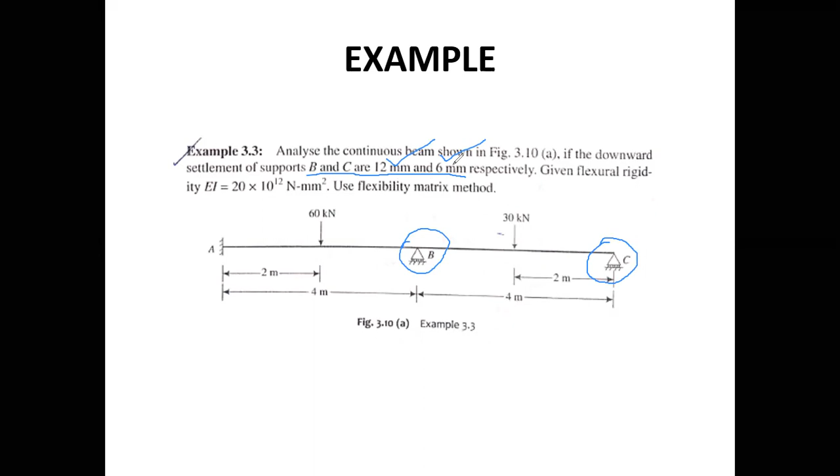is that supports B and C are showing a settlement of 12 mm and 6 mm respectively. That means this support B and this support C is giving a displacement, settlement of 12 mm and 6 mm respectively. So by keeping these things in mind, we'll simply proceed as we have done the analysis for previous cases.

So first of all, step number one will be drawing an M upon EI diagram for this. Before that, we need to know how many coordinates should be there. So in this case, at this support, the number of reactions will be 3. At this support, it will be 1. At this support, it will be 1. So total, it will be 5. 5 minus 3 equilibrium equations is equal to 2. This is the degree of static indeterminacy in this case. So at least 2 coordinates should be selected in order to analyze this.

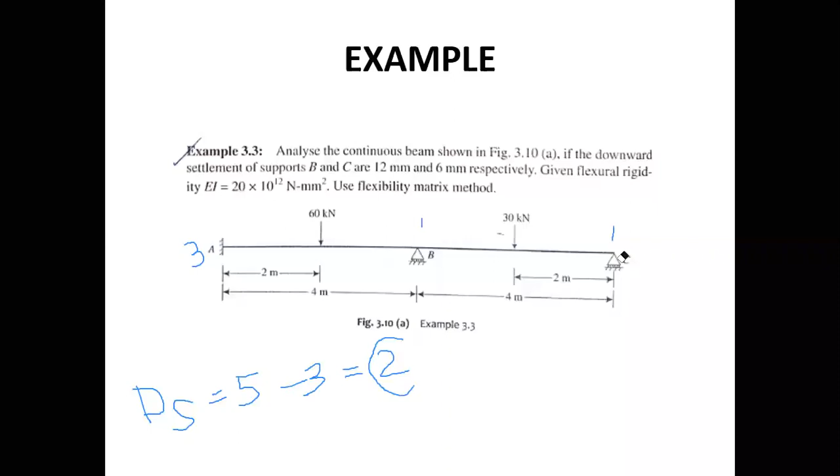So we'll start. Here, we have selected B and C as 2 coordinates. Coordinate direction 1 will be B and coordinate number 2 will be C. So the second step is we will draw the moment diagram and proceed to its M upon EI diagram. So this figure shows the M upon EI diagram. This diagram varies like this. This is a real beam, and this is its conjugate beam.

We know that in case of a conjugate beam, the fixed end becomes free. That's what happens over here. Also, the free end becomes fixed. So A has become free and C has become fixed. So this is the M upon EI diagram for the particular beam. And here, the total displacement in the coordinate direction 1 will be equal to the moment at B dash in the conjugate beam. This is by the conjugate beam theorem. So moment at B dash will be what?

Moment at B dash will be due to the loading, that is due to this load. This will be simply the load of this trapezium. Load of this trapezium will act here. So load of this trapezium multiplied by the perpendicular distance, then again load of this trapezium multiplied by the perpendicular distance will give the total moment at B dash. So it can be formulated like this: 120 multiplied by 2 multiplied by 3 plus 1 upon 2. That is a triangle.

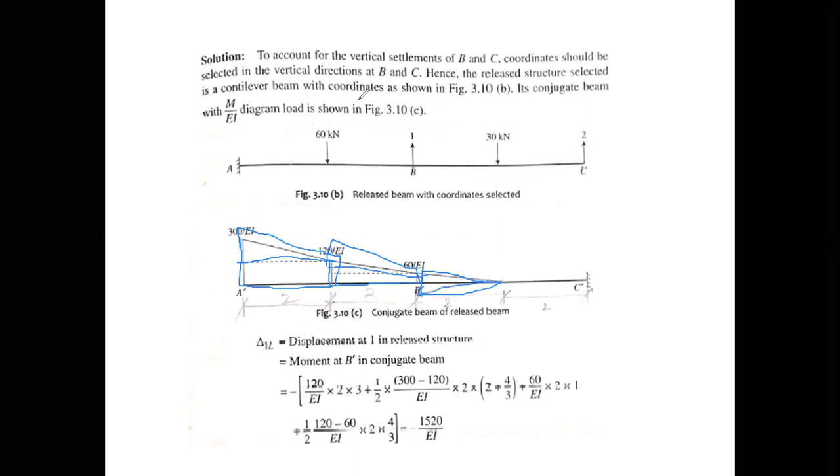So this is how we can calculate the total load of this diagram and simply get the moment using all these equations. We get the moment over here equal to minus 4279.86 upon EI, and by substituting the value of EI, we get the final delta 2L equal to minus 0.214 meters.

Now, for getting the flexibility matrix, we have to apply the unit load in coordinate direction 1 as well as 2 and get the final displacement. So we have applied a unit load of 1 kilonewton in coordinate direction 1, and this is the M upon EI diagram for the same. This will give the value of del 11, that is the displacement in coordinate direction 1 due to the load applied in coordinate direction 1 only.

So this is the load. This is applied over here. When we have applied the load of 1 kilonewton over here in coordinate direction 1, this was coordinate 1 and this was 2. These are the coordinate directions. We have applied load over here and we are seeing its impact on the same point, which denotes delta 1 1. Then in this case, similarly, that is the moment at B dash.

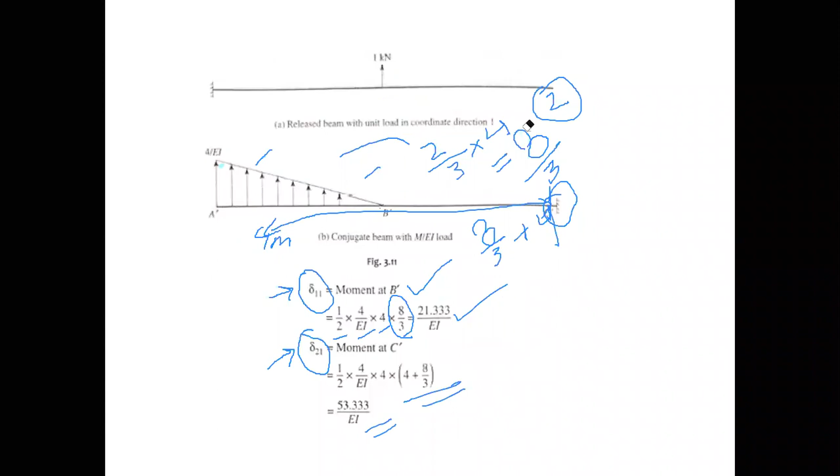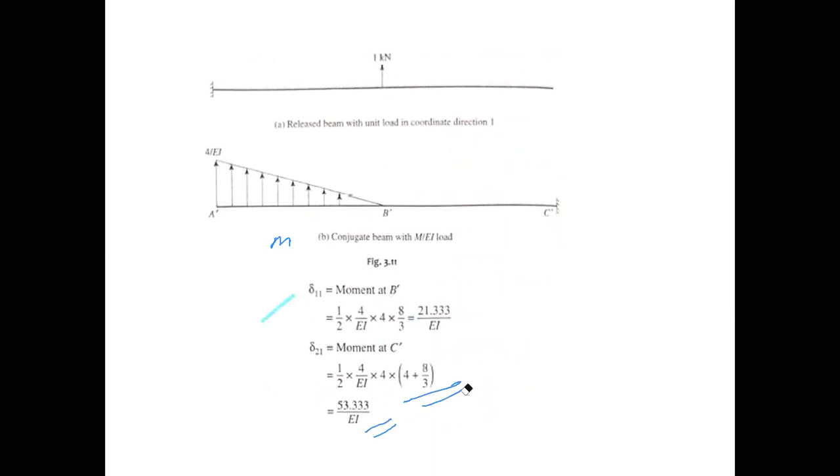So in the first case, we have applied this unit load in coordinate direction 1. Now we have 2 coordinates, so in the second step we'll apply this unit load in coordinate direction 2 as well, and we'll calculate the displacement coordinates. So in this case, we have applied a unit load in coordinate direction 2, and the M upon EI diagram for the same comes out to be like this.

Again, this del 12 represents that the load is applied on coordinate direction 2 and its impact is seen on coordinate direction 1, that is over here. So we have to calculate the displacement coordinate over here. That will be equal to the moment over here at B dash. So the moment over here will be simply due to this loading,

the load of this, which can be divided into the load of this triangular portion and this rectangular portion, and the whole load will give the moment at this point. So we have to calculate the moment at B dash, and that will be equal to del 12. So the load of this triangle is half into base; base is 4, into height; height is 4 upon EI.

See, this height is 4 upon EI. So the height over here will be 4 upon EI, and the rest of the height will also be 4 upon EI. So this is 4 upon EI multiplied by 8 by 3. 8 by 3 is the distance from its centroid to this point, plus the rectangular portion.

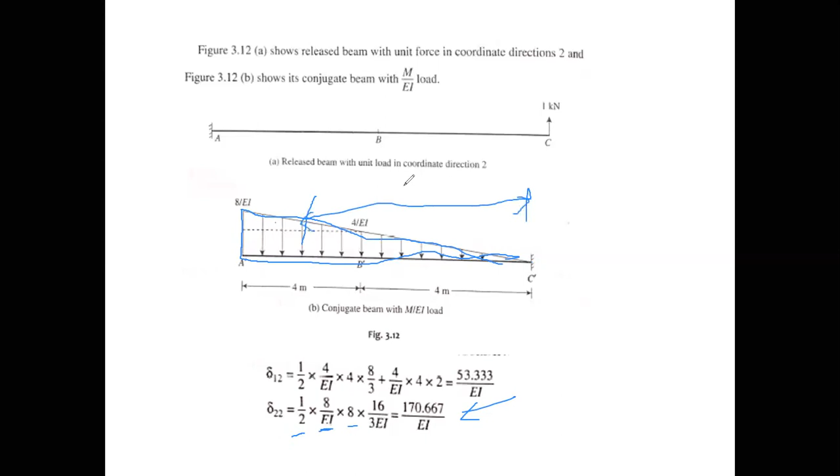That will give the value 170.667 upon EI. This is multiplied by the distance from the centroid of this triangle, and we know that this is 2 by 3 of the base. The base is 8, so that is 16 upon 3. This is what is written over here.

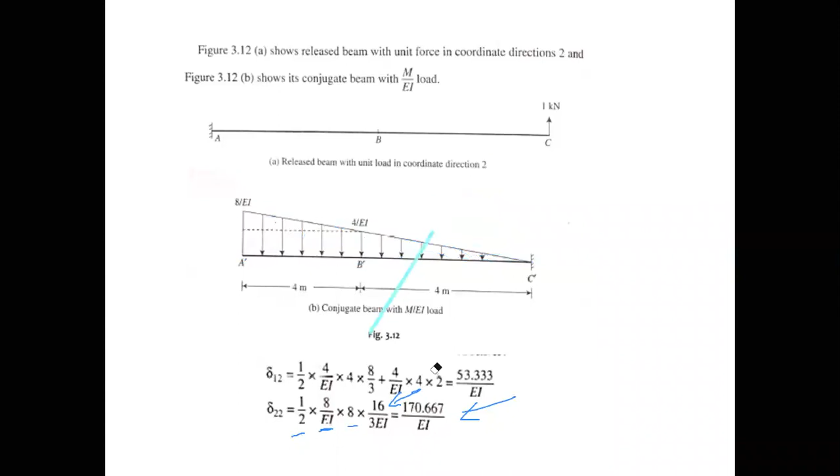This is how we have calculated all four displacement coordinates, and we can simply write our flexibility equation. We'll substitute the values of these coordinates over here in this matrix. Now, the question asked for the final displacement. See, in the question it was given that

supports B and C are showing a settlement of 12 mm and 6 mm. So we can simply conclude that the final delta matrix will give these two coordinate components, that is minus 0.012. That was in mm, so we have converted it to meters, and the minus sign simply shows the settlement is in the downward direction.

Similarly for the support C as well, that is minus 0.006. So we'll substitute all these values into this flexibility equation like this. These all are the values of delta, del 11, del 12. This is del 21, and this is del 22.

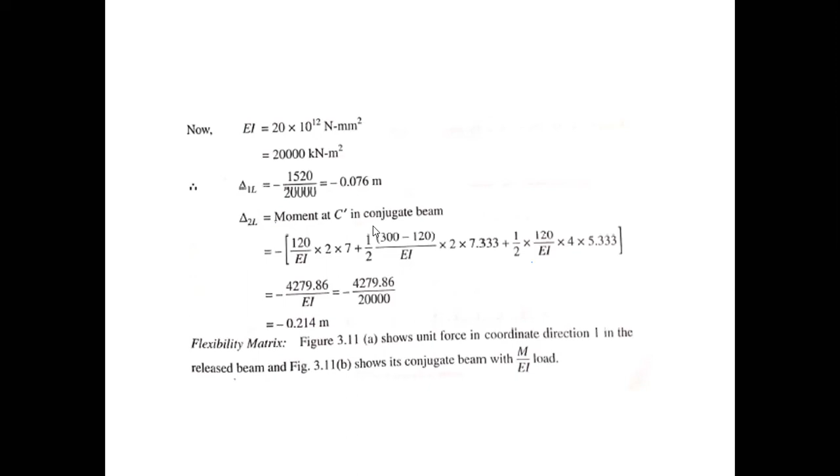Over here, we have calculated delta 1L and delta 2L. These are the final displacements due to the load in coordinate direction 1 and coordinate direction 2. So we have substituted the value over here, and this will give the final forces in coordinate direction 1 and coordinate direction 2, that is F1 and F2. So this thing goes to this side, and this will give the inverse of this, and we can simply calculate its inverse like this.

That is by putting the value of EI. We know that it is 20,000. So 20,000 divided by, we have already discussed the method to calculate the inverse, that is 21.333 multiplied by 170.667 minus 53.333 multiplied by 53.333, or we can simply say its square. Then this diagonal will change the position, and this diagonal will change the sign. So this is what happens over here, multiplied by this thing.

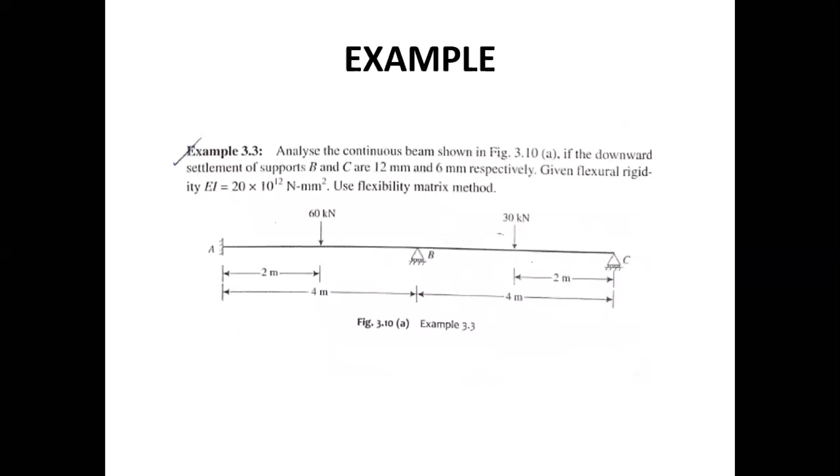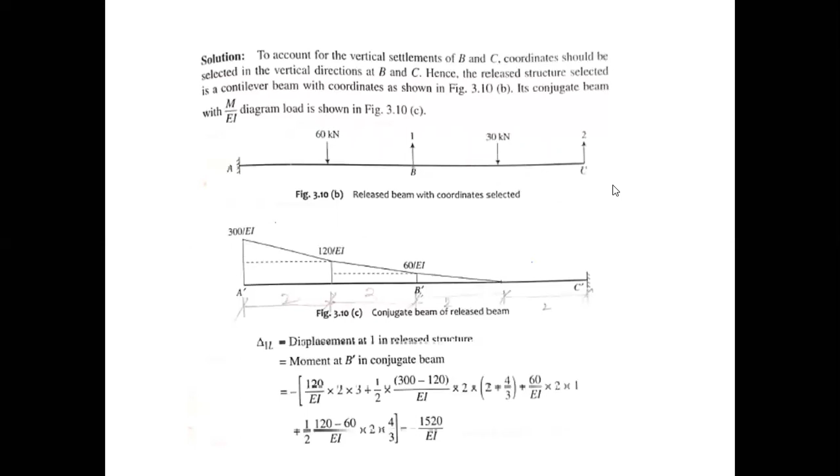On solving this equation, it will give the final forces, that is F1 is equal to minus 4.28 and F2 is equal to 25.71. We have already discussed that this minus sign says that the direction we have taken for F1 was upward, and the direction for F2 was also upward. So the minus sign shows that the direction will not be upward, it will be downward in coordinate direction 1. Whereas for coordinate direction 2, the direction that we have chosen was okay.

Similarly, moment at A will be 25.71 multiplied by 8. See, this 25.71 was the final force. So the final force 25.71 multiplied by 8 minus 30 multiplied by 6. This is the distance 6. So it is 30 multiplied by 6 minus 4.28. Sorry, 25.71 was F2, and 4.28 was F1.

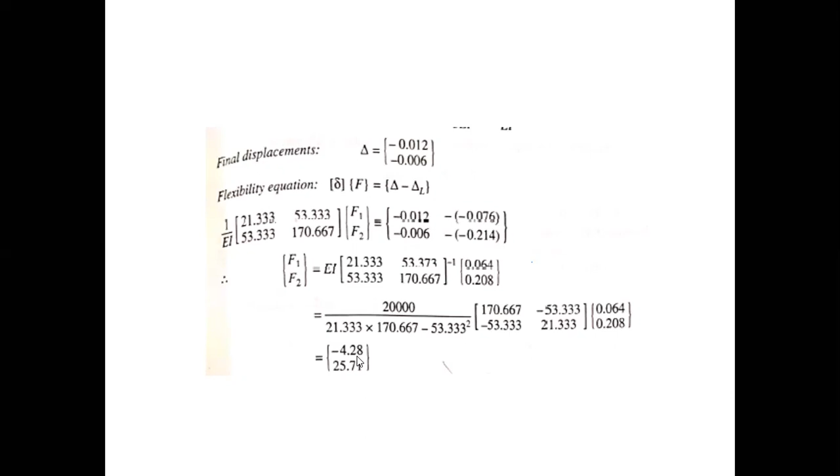So F1, that is minus 4.28 multiplied by 4 minus 60 multiplied by 2. This is 60 multiplied by 2, because we are calculating moment over here at A. This is A, and this is B. So this is how we can calculate, and we'll get the final bending moment diagram for this case.

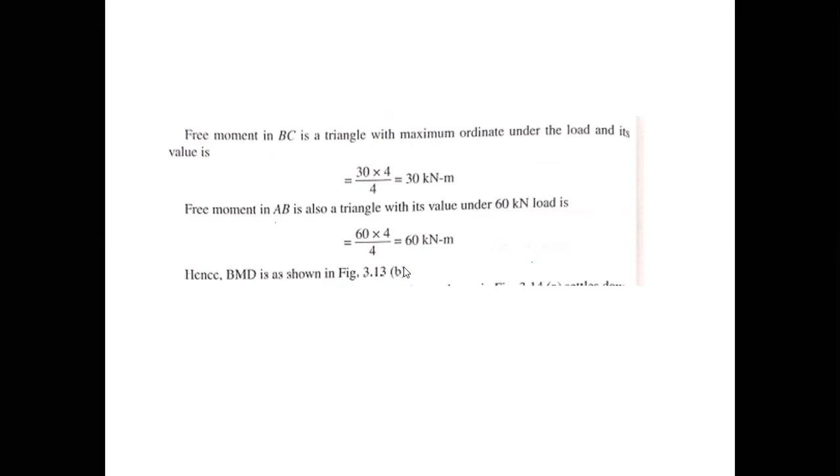So this is the calculation of free moment at BC, triangle for this portion, 30 multiplied by 4, that is 30 kilonewton meter. This is what we have written over here, and this is free moment at AB. It is also a triangle, value of 60 kilonewton, so it will be WL by 4, that is 60 kilonewton meter. So the BMD is over here. This is how we have analyzed this continuous beam using the flexibility matrix approach.